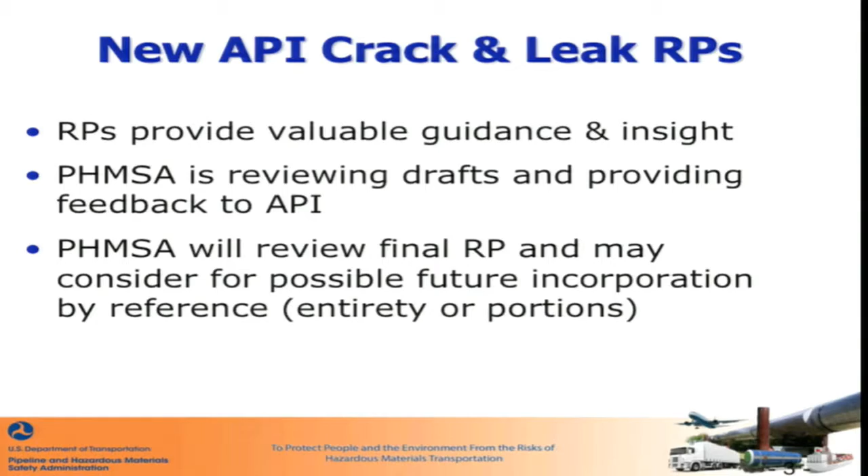To give you some of the background behind all this, recent incidents have highlighted some of the issues that we've had with crack and leak detection. In some of these accidents, ILI tools, a crack detection tool, were run less than 2 years before the incidents took place and failed to identify the critical cracks which failed. Some of these were criticized for not detecting the leak soon enough and not shutting down the line soon enough.

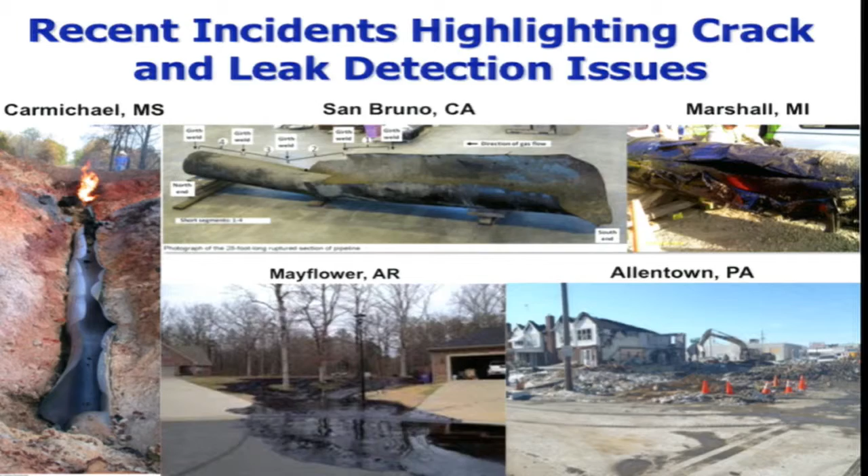I'd like to say that cracking is one of the top causes of pipeline failures. Many of these cracks are difficult to detect, especially in older pipe steels that have lower toughness than today's modern steels, and they can be difficult to find even with the state-of-the-art modern crack ILI tools which we have today.

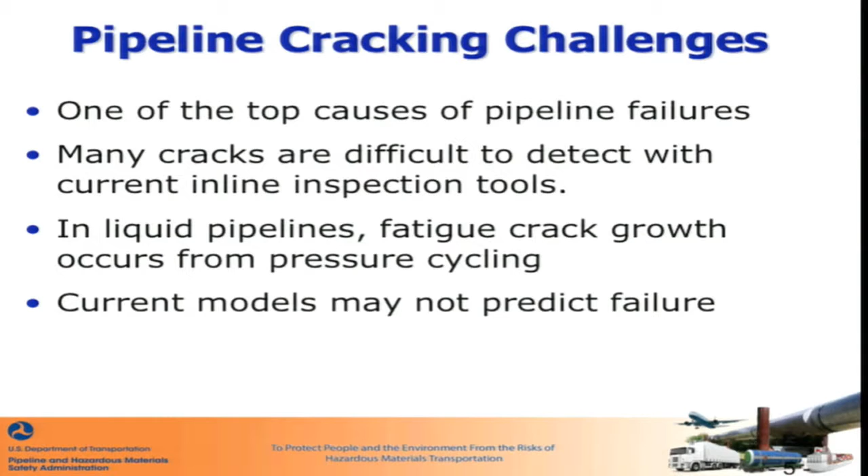In liquid lines, cracks are more of a concern because we see more severe pressure cycling that can result in fatigue crack growth. And current ductile crack models may not predict failures that you may have in some of these vintage brittle steels and seam types.

So leaks also pose a big challenge. Small leaks may be very difficult to detect, especially in high volume lines. Some liquid lines can flow over 10,000 barrels per hour, and it may be very difficult to detect a small leak in those lines. And some lines deliver batched products where they may be flowing gasoline one day, diesel another day, jet fuel another day. So that may be difficult, or the product may vary in that line.

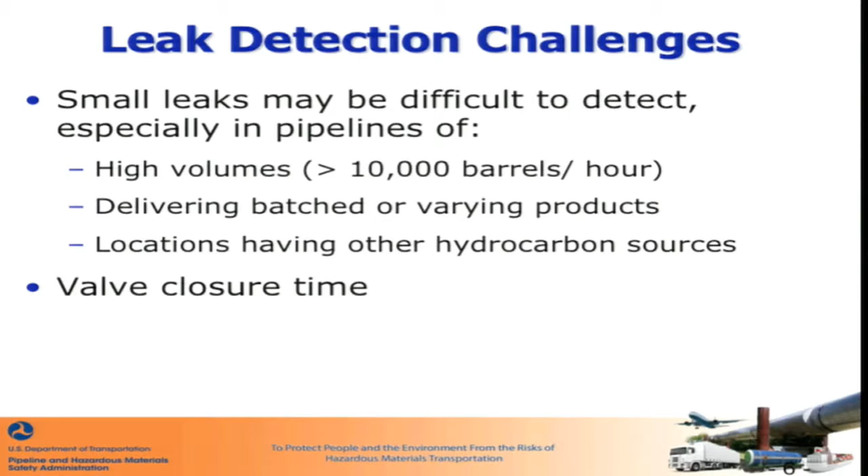And also, some of these lines flow in areas where there's other sources of hydrocarbons, naturally or from other sources. So it may be difficult to pinpoint a leak from that specific line.

And this also ties in to the valve closure time, because one of the metrics may be time from leak detection to valve closure. And this may lead into discussions about valve spacing, automatic valves, and remote control valves to try to speed up valve closure times. So this relates to those efforts too.

This is one of the charts that's in the RP document, and this talks about some of the methods of leak detection and the size of the leak. So since we're short on time, I won't cover this in detail, but they can range from ruptures to very small leaks or seeps. So there can be a wide range of flow rates with leaks.

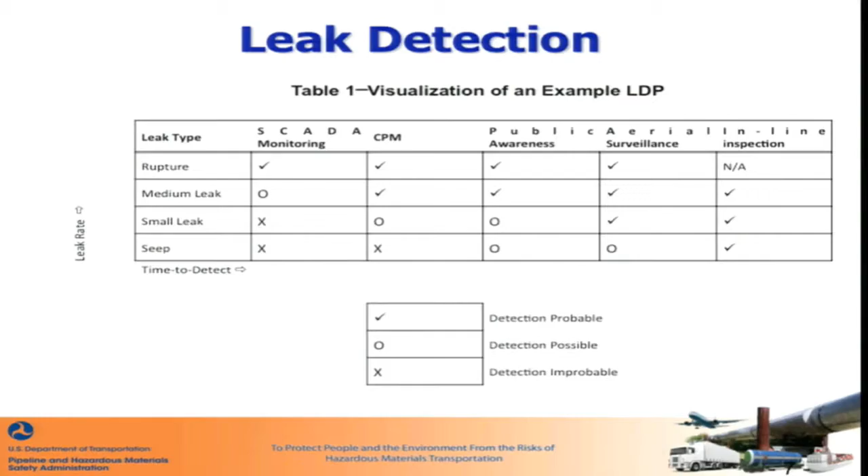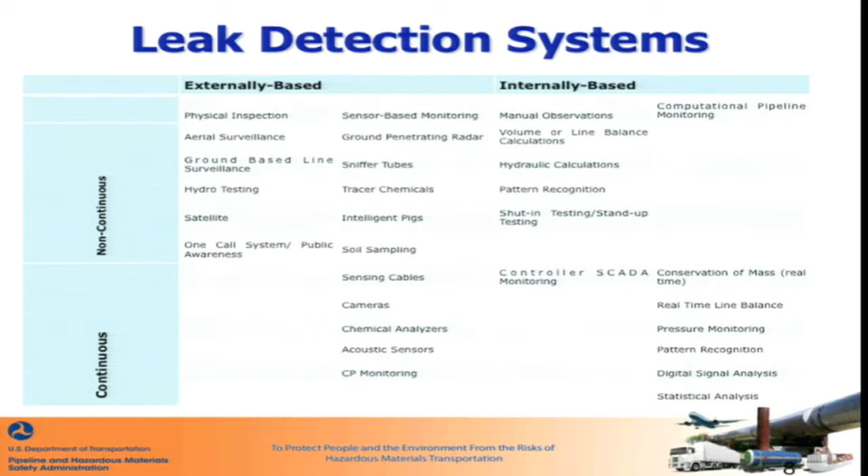And there's a number of technologies that can be used, external and internal leak detection. This can be continuous and non-continuous methods. So there's a lot of methods that can be used for leak detection.

Some of the work that PHMSA has done is we had 2 workshops in the past. In 2014, we had a Managing Pipeline Cracking Challenges workshop. And in 2012, we had a leak detection workshop. So there are many efforts to address this. That includes rulemaking, standards development, like these API recommended practices, and research.

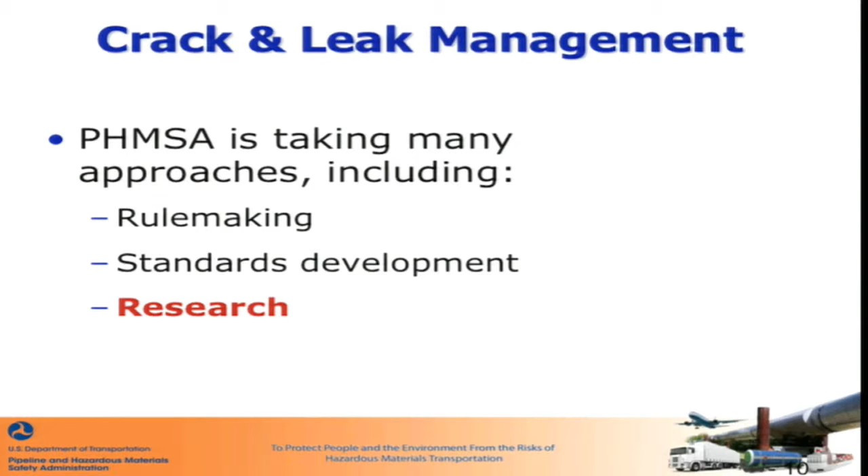And I'd like to focus on the research side. The research side is interesting because it's quite a change from regulations, where we focus on penalties if you don't meet the minimum bar.

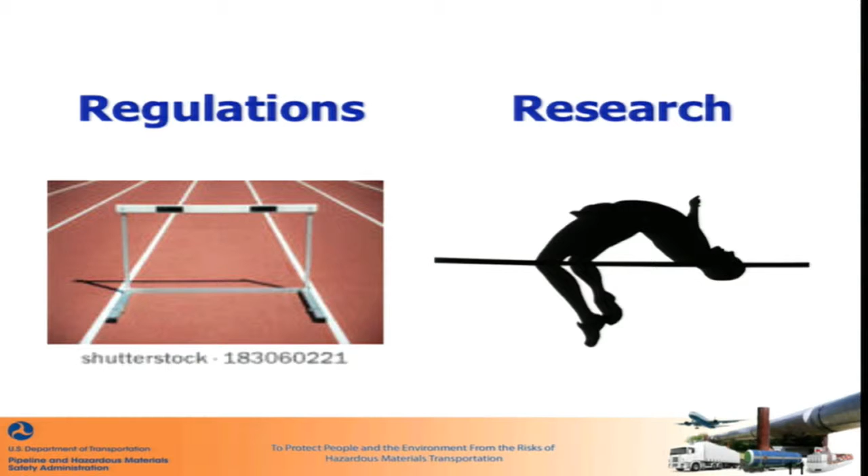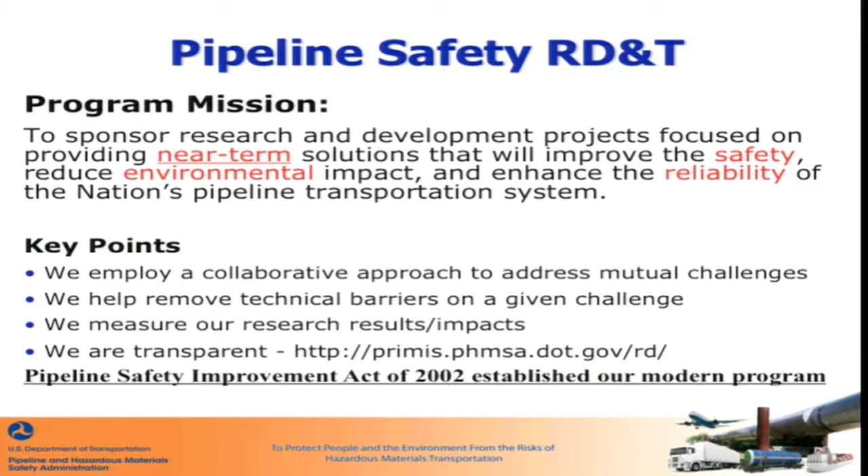Research is jumping as high as you can, trying to advance technology and understanding. So it's a much different approach to tackling the issues. And I think Jeff talked about our R&D program a little bit yesterday, but we focus on trying to obtain near-term solutions to impact pipeline safety. And this slide talks more details about that.

But we focus on 3 different areas: developing new technologies, strengthening consensus standards, and promoting knowledge and understanding of the issues. And I think we showed this slide yesterday a little bit at the bottom, and we have about a $12 million annual research budget for our core program at the moment.

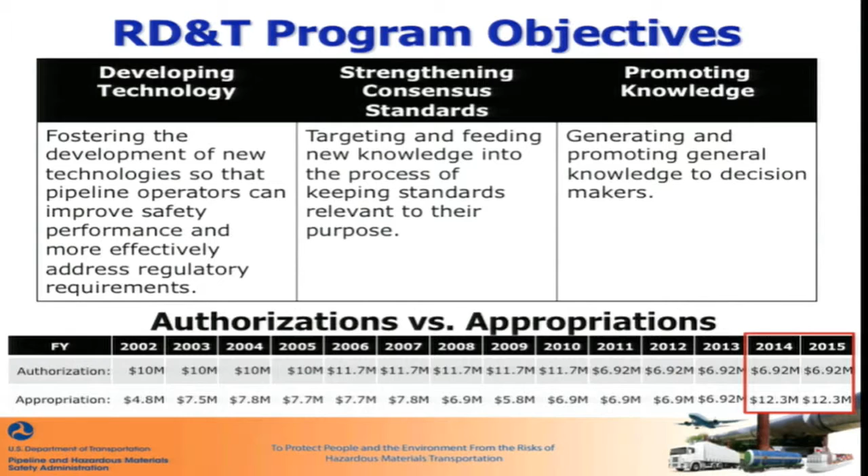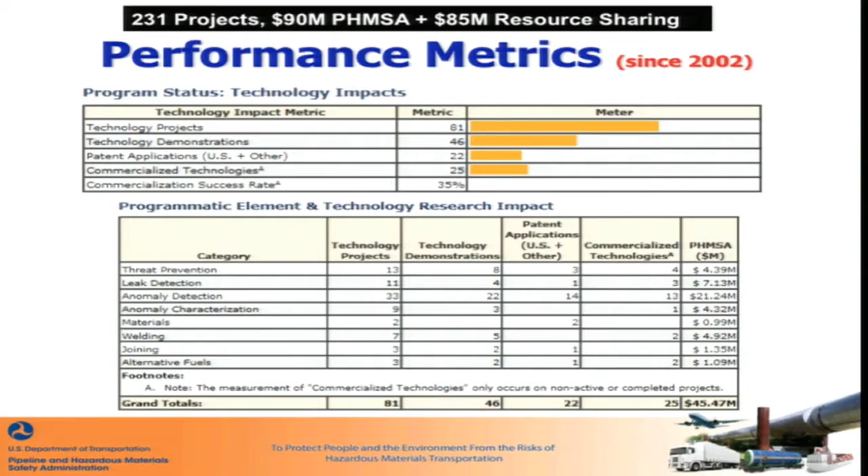And many of the projects that we have focus on cracks and leaks. For crack research, we have over a dozen projects, over $13 million. And for leaks, we have over 20 projects and over $10 million. And the past research has resulted in 3 commercialized technologies that have reached market and that are being used.

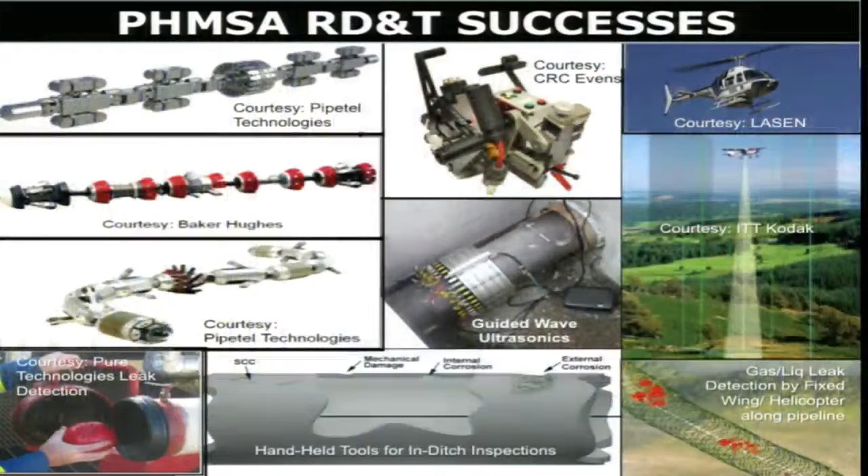And here are some of the successes which we have, and you can see many of these focus on cracks and leaks, including what you see on the right-hand side, some aerial leak detection methods using lasers, and on the left-hand side some ILI tools, to improve the technologies for ILI tools that can go in unpiggable lines and to increase the resolution of the state-of-the-art tools that we're using today. And on the bottom left, you see a ball sensor that can listen for leaks as the ball flows through that line. So there's a number of different technologies that we're funding to try to improve.

One of the big ones which we have related to cracks is the ERW pipe seam study. Keep in mind that many of these projects overlap many categories. So this focuses a lot on vintage pipe seams as well as cracking. And phase 1 of this study focused on studying and understanding the problem of cracks in ERW pipe seams. There's a paper that's on our website here. You can see the web page there that you could download that has a study of over 100 ERW failures.

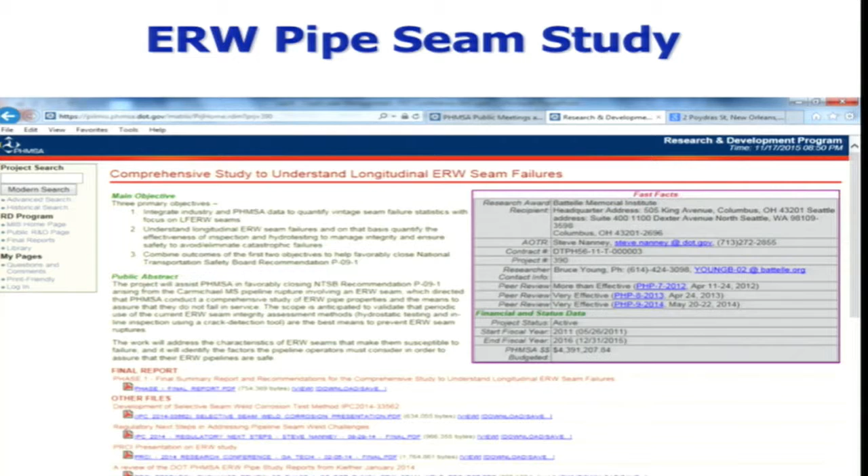And it also talked about how some of the models used today are not appropriate for all seam types, seam type defects that we're seeing now. So there's a significant amount of understanding that was developed in this. And then in phase 2, they're working on solutions on how to address this, including new technologies and ILI tools, pressure test methods, and also full-scale testing to validate and improve models.

And there's a lot of lessons learned here, which I won't get into because we're short on time. But I think this has significantly increased our understanding of these issues and helps improve the rate of crack detection, preventing future cracks from failing.

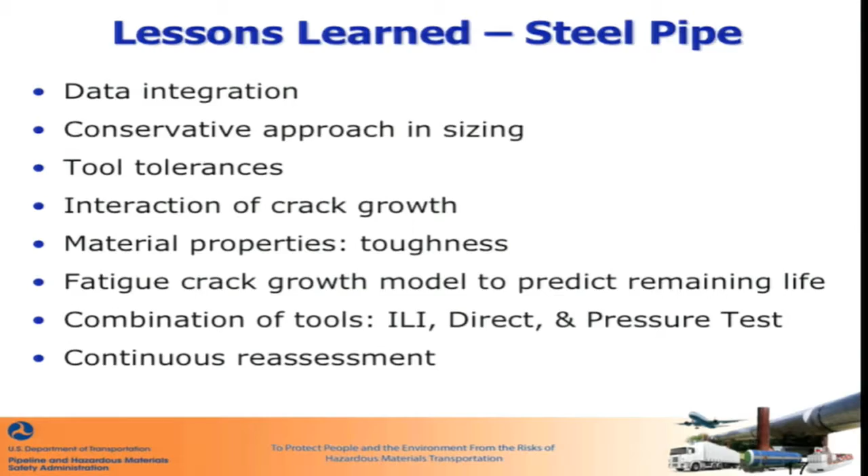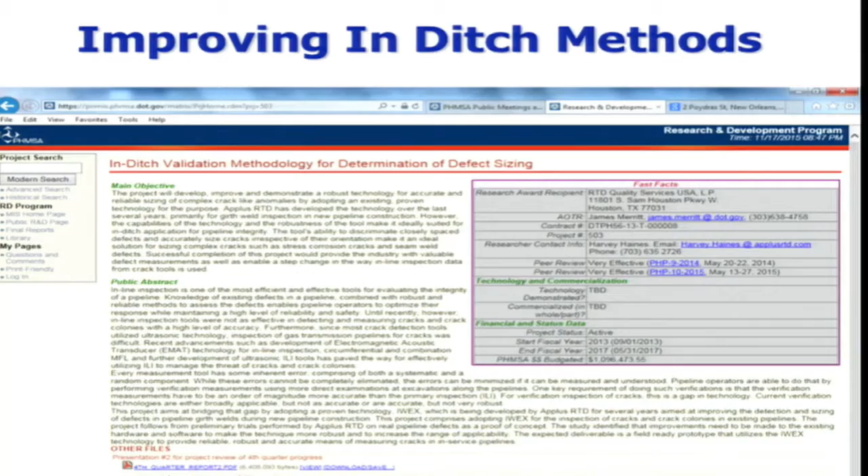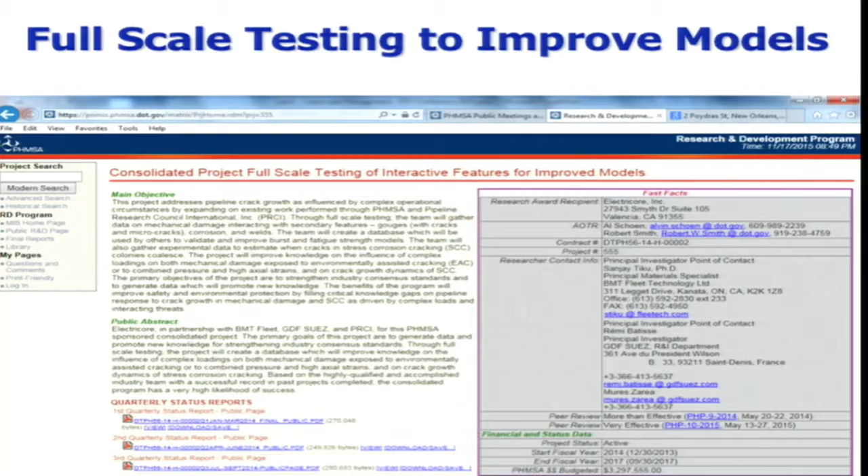There's also studies that we're doing on improving in-the-ditch methods, because we're seeing that in-the-ditch defect measurements are not as good as they could be. So we're doing work there to improve those methods. And there's a lot of work we're doing to improve full-scale testing, because this is pretty much the main way to show that your models are working. Do the real-world test results follow all of the equations and calculations and predictions which you're using now?

We have a project on improving leak detection system design, redundancy, and accuracy. So this is one of the many projects which we have now. And I just want to point out that this research is showing there's probably not going to be a silver bullet or magic technology that will address this issue. And probably one size won't fit all, because we're dealing with pipelines that can be modern steels, vintage steels, liquid lines, gas lines, class 1, class 4. So there's many issues that we don't think one tool or technology can address.

And research is pointing to using more tools in the toolbox, developing better tools, and how to use different tools in a complementary way to get the results which you need.

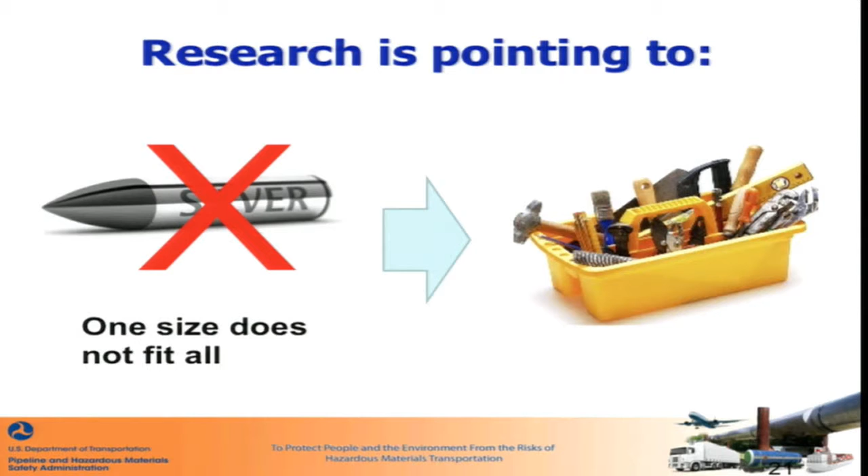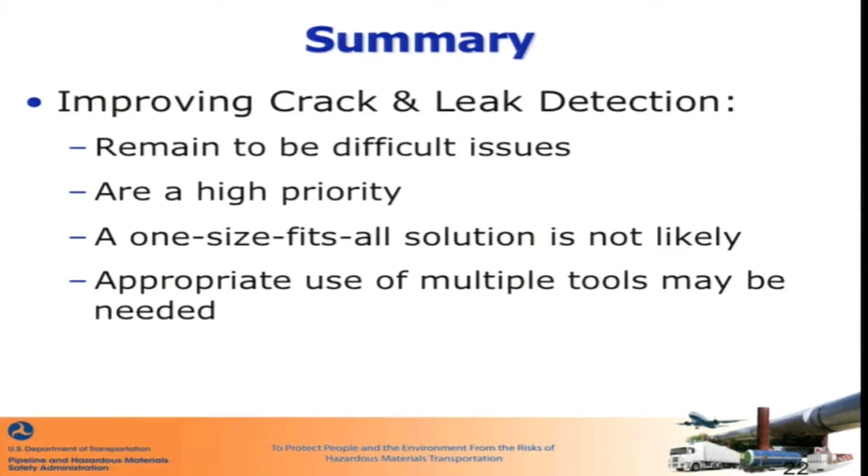So to summarize, crack and leak detection remain difficult issues which we're trying to solve. They are a high priority for PHMSA. We're devoting a lot of resources and efforts to address these issues. Like I said, a one-size-fits-all solution is not likely. That's where the current research is, and these are some of the leading researchers in the industry, what they're saying. And appropriate use of multiple tools may be needed, and better tools, of course, to address these issues.